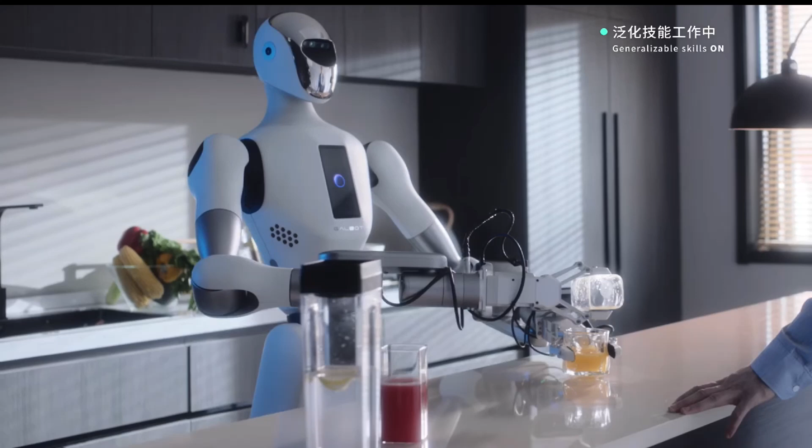In today's video, we'll explore the groundbreaking technologies coming out of China, meet some of the most advanced robots in the world, and discuss how these innovations are set to change our future. Get ready to be amazed and maybe even a little bit shocked. So buckle up and join us as we uncover how robots from China are not just participating in the global tech race, they're leading it.

Galbot is a humanoid robot developed by Beijing Galbot, a robotics company founded in the Chinese capital in May 2023. The robot can grab designated items from racks, fold clothes, and open drawers and closets. The company focuses on developing robots with embodied artificial intelligence for industrial production and daily use. While traditional AI operates solely in the digital realm, EAI integrates digital AI with real-world applications, enabling robots to move, see, and interact with humans.

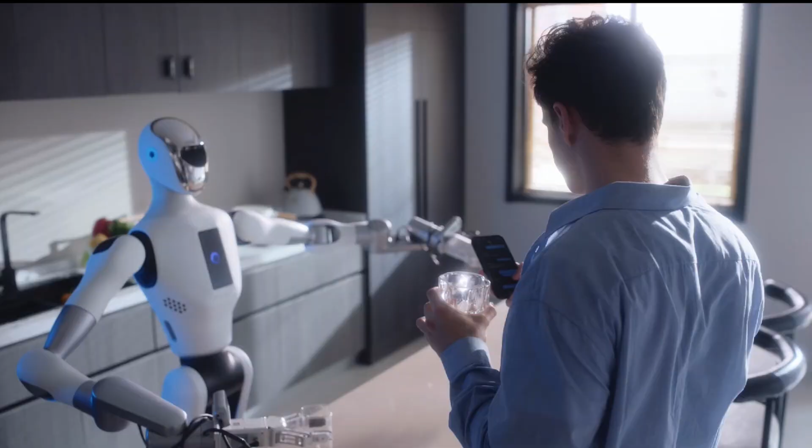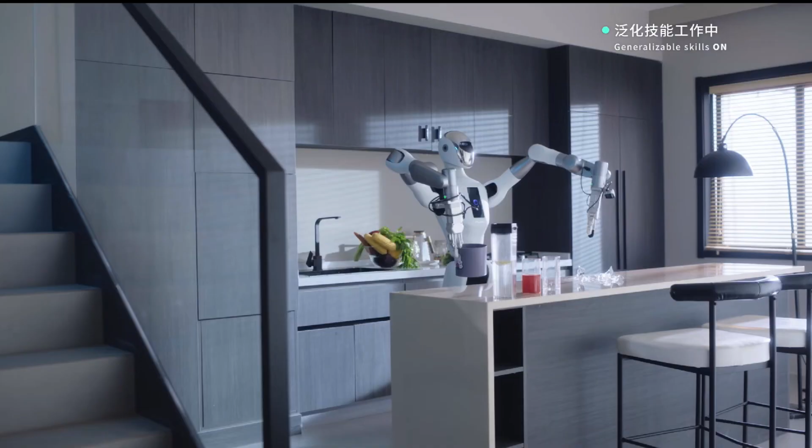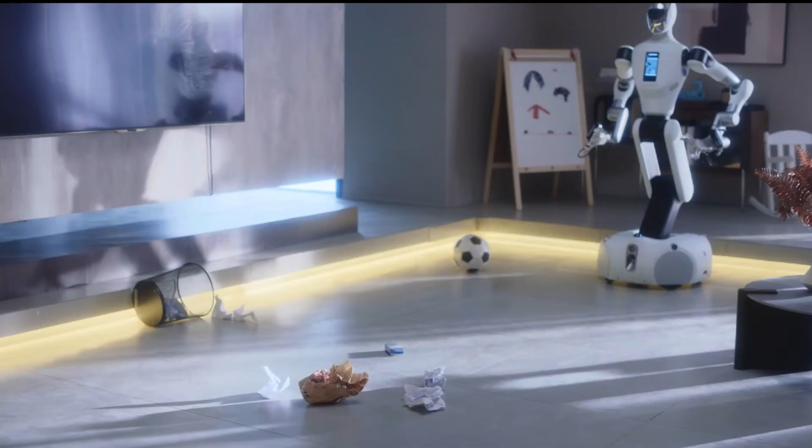Galbot, standing 173 centimeters tall, has a chassis that rotates 360 degrees. It can extend to reach a height of 2.4 meters and squat to perform tasks on the ground. Equipped with a system for sensing its environment and carrying out human commands, Galbot can identify specific items of different shapes or materials, autonomously navigate to them, and grasp them. According to Zhu, product director at Galbot, the robot is poised to be used in fields including automobile manufacturing and retail applications, like contactless supermarkets. The company is also exploring applications in logistics and agriculture.

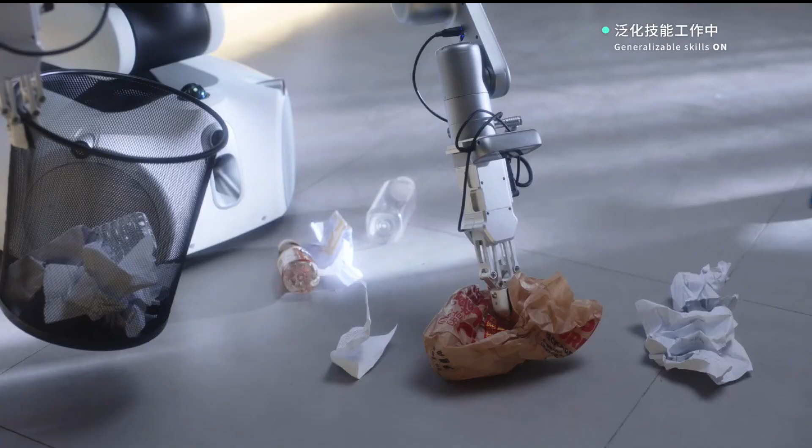The development of China's robotics industry can be attributed to the Chinese government's policy support and progress in independent research and development. The boom of AI and machine learning brings infinite possibilities to the robotics industry, Zhu said.

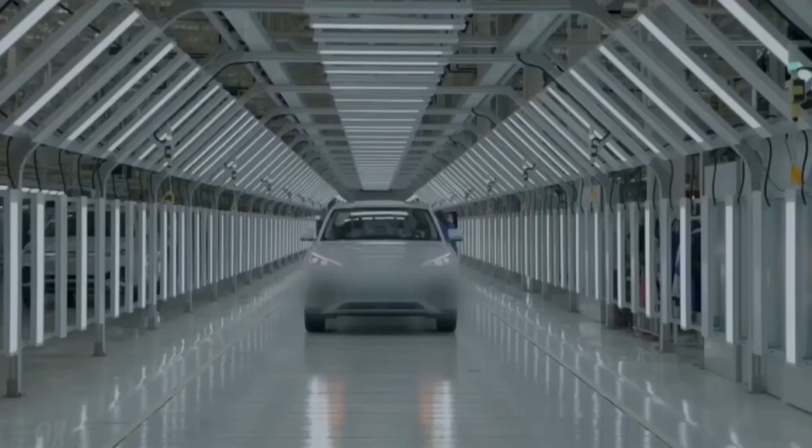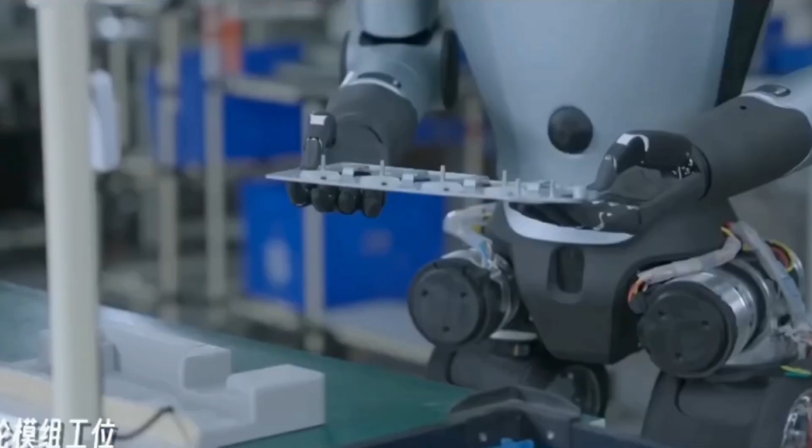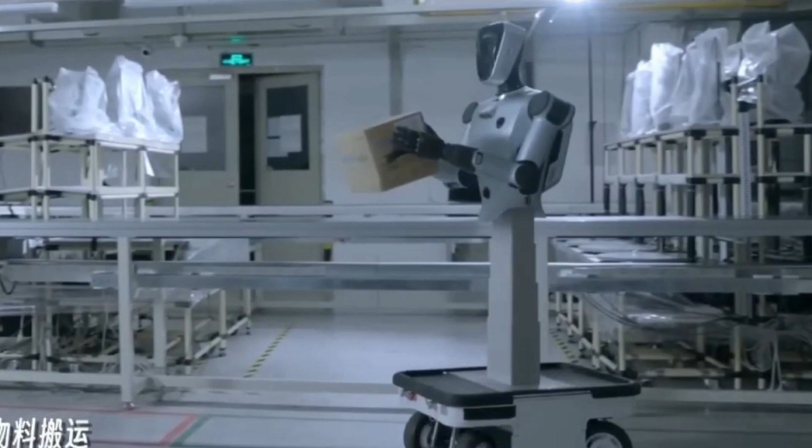Expedition A1 by AgiBot is a humanoid robot that stands 1.75 meters tall and weighs 53 kilograms. Initially designed for factory settings, this impressive robot also aims to find a place in household kitchens, making daily life easier for everyone. Expedition A1 can walk stably at speeds up to 7 kilometers per hour, demonstrating remarkable balance and agility. It's incredibly versatile, capable of performing a wide range of tasks, such as tightening bolts on assembly lines, using inspection tools with precision, conducting thorough vehicle exterior inspections, and even being utilized in complex laboratory experiments.

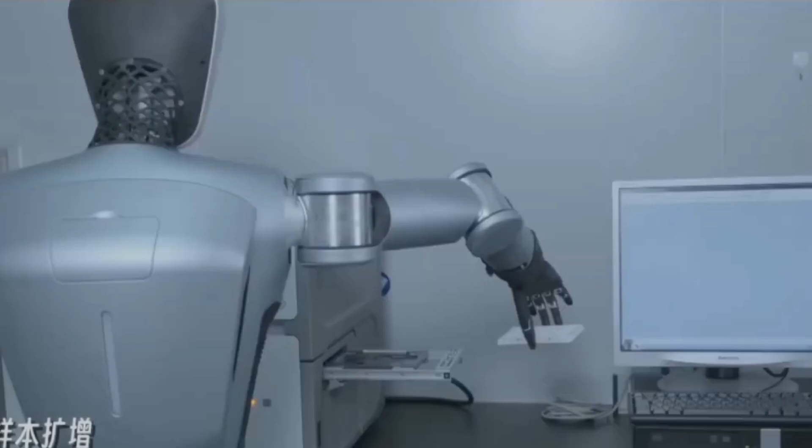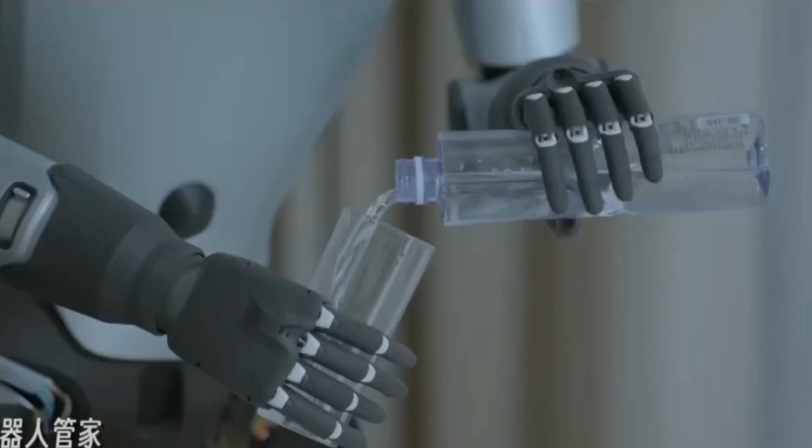Astribot's ambitious goal is to further develop Expedition A1 into a reliable household assistant. Imagine a future where the robot can fetch and pour water for you, deliver medications with care, and efficiently perform household chores like preparing ingredients, cooking meals, and even cleaning up afterward. The possibilities don't end there. In the future, Expedition A1 could be a valuable educational aid, helping children with their homework by providing explanations, guidance, and even giving a thumbs up for good work, fostering a positive learning environment.

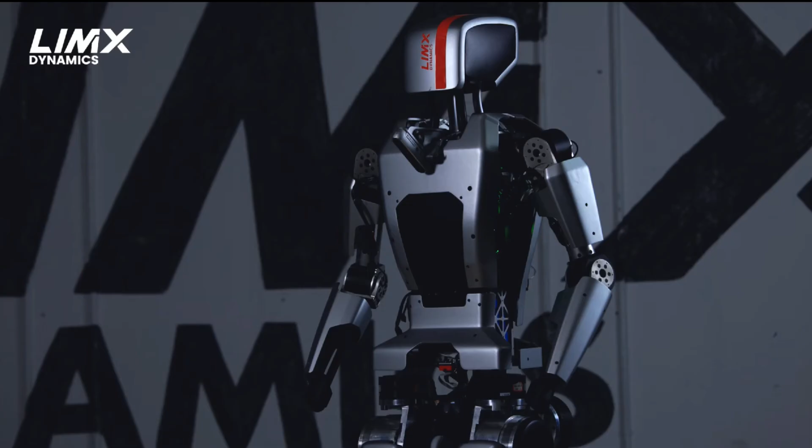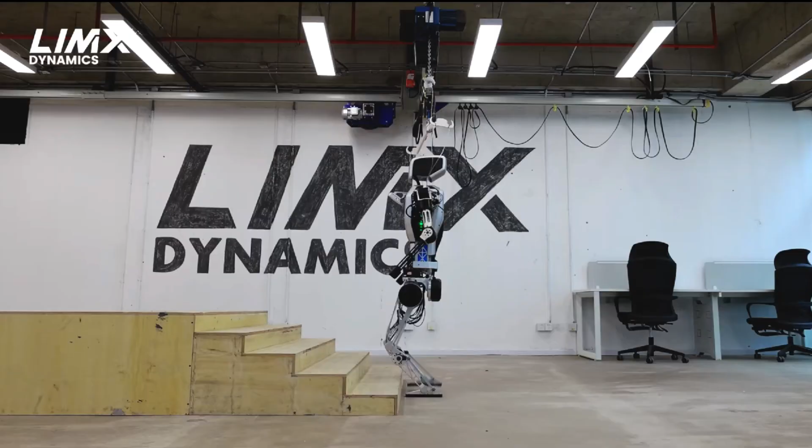LimX Dynamics introduced a new humanoid robot called CL1. The Shenzhen, China-based company claims that CL1 can perform various tasks by closing the loop between real-time perception, gait planning, locomotion control, and hardware and data streams. During testing, CL1 used perception control to adjust its motion proactively. This allowed the robot to take smooth steps onto a curb, ascend stairs dynamically and fluidly, and walk down a 15-degree slope. The company tested CL1 indoors and outdoors, from afternoon to dusk, to evaluate its performance in different environmental conditions.

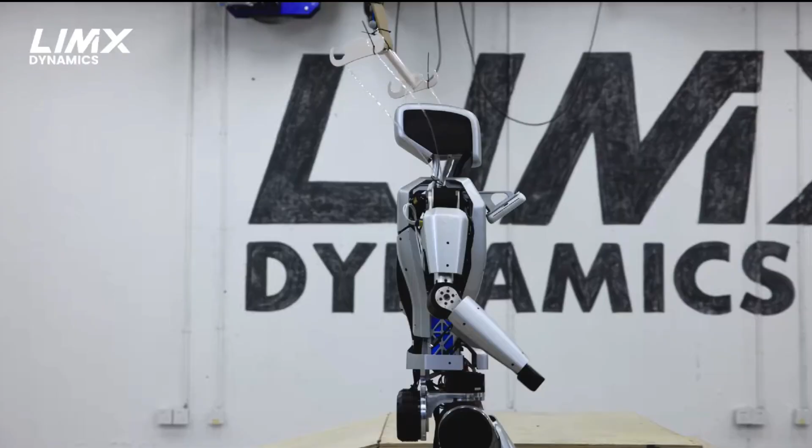LimX Dynamics expects its humanoid robots to be deployed in B2B and B2C applications. They plan to focus on hazardous scenarios, high-end customer service, automotive manufacturing, and in-home services. The company's environmental perception technology is a key part of the evolution of its humanoid robots. CL1 uses advanced algorithms to achieve full-loop integration of perception, controls, and hardware, according to LimX. This allows the robot to break free from the limitations of blind locomotion and achieve real-time interactive motion with its environment. The robot uses self-developed actuators, which the company claims provide exceptional impact resistance and precise, rapid torque control. All of its robots, from wheeled quadrupeds to humanoids, are based on a core set of algorithms.

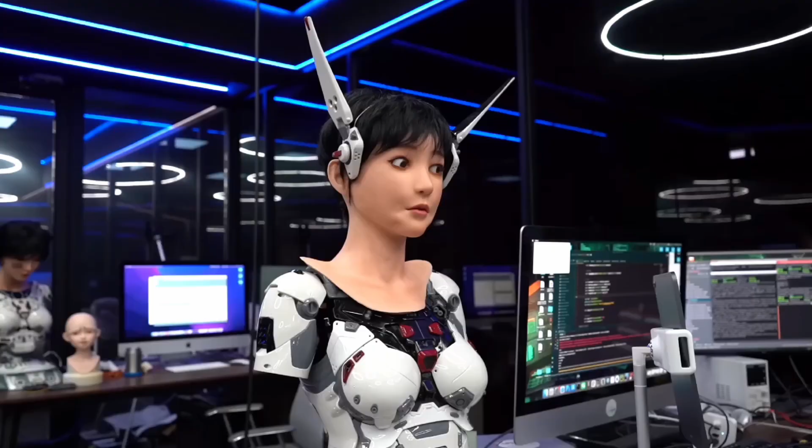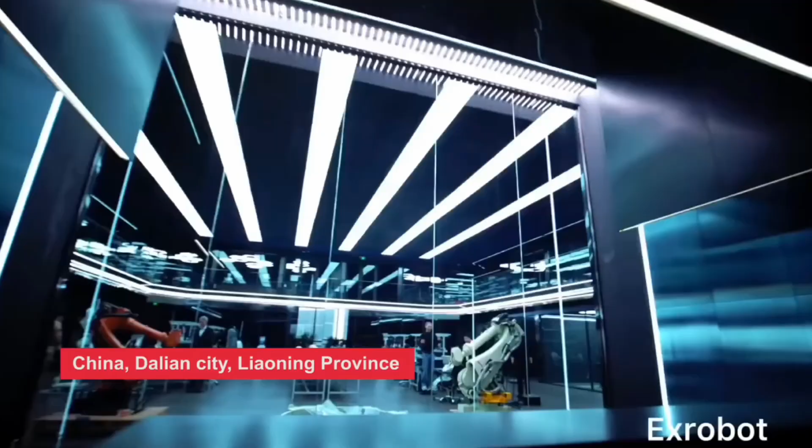One of the most striking examples of Chinese humanoid robots comes from Exrobot, a company known for its lifelike androids. A recent video from inside their factory has shocked the internet, showing partially skinned humanoids with human-like hair, skin, and movements. This level of realism has plunged viewers deep into the uncanny valley, where human-like robots elicit a sense of unease and discomfort. Exrobot's approach to humanoid design is not without controversy, as the company has embraced the lifelike appearance of their creations. The attention to detail in the female robots, complete with goosebumps on their silicone skin, suggests a deliberate attempt to captivate and intrigue the audience.

This strategy, while polarizing, has succeeded in drawing attention to the company's capabilities. While Exrobot humanoids may appear to be cutting-edge robotics, they are, in fact, highly advanced animatronics. The company's X Future Science and Technology Museum in Dalian showcases a range of lifelike characters, from Einstein to Edison, blurring the line between reality and fiction. Visitors can even control a humanoid head using motion capture, further immersing themselves in this uncanny world.

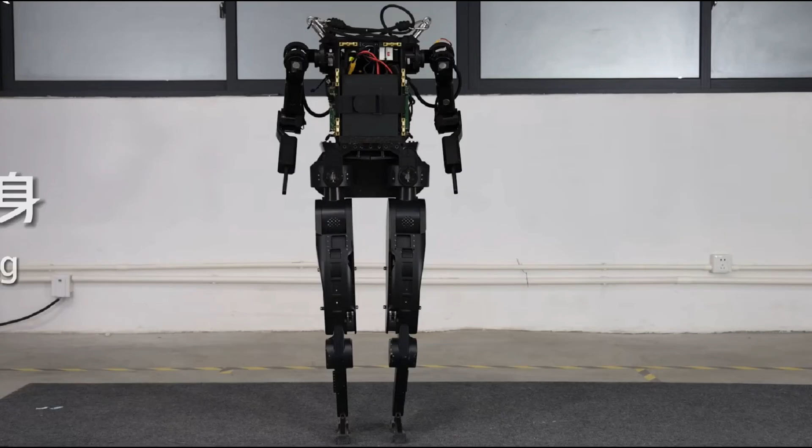While ExRobots may be grabbing headlines with their uncanny androids, the real story in Chinese humanoid robotics lies with companies focused on developing practical, general-purpose robots. In October 2023, XPeng, an automobile-focused company, introduced its self-developed humanoid bipedal robot, PX5. After 5 months of exploration, the robot has achieved stable walking capabilities and can navigate various obstacles, demonstrating stability across all terrains. Standing around 1.5 meters tall and sporting a silver-white color, PX5 resembles the Japanese anime character Astro Boy.

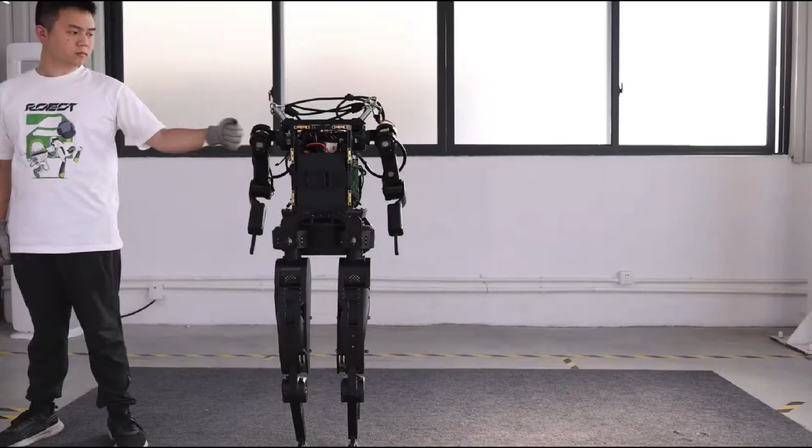Resistant to shock, the PX5 can withstand impacts and remain steady even when kicked. It can also maneuver on grass and rocky terrain, play football, ride Xiaomi's self-balancing scooter, and more.

Research at Xpeng is also underway to develop new components to improve the performance of its humanoid robots while reducing costs. For example, the company has developed high-performance joints to achieve stable walking abilities, enabling the PX5 to walk indoors and outdoors for over 2 hours and overcome obstacles.

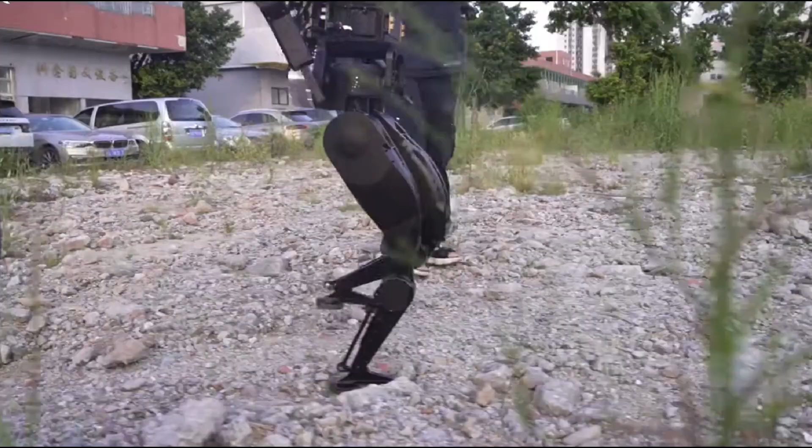Dexterity is another technical challenge that Xpeng is actively addressing. While other companies are cautious about developing robotic hands and prefer to wait for suitable suppliers, Xpeng has developed a series of robotic hands and mechanical arms.

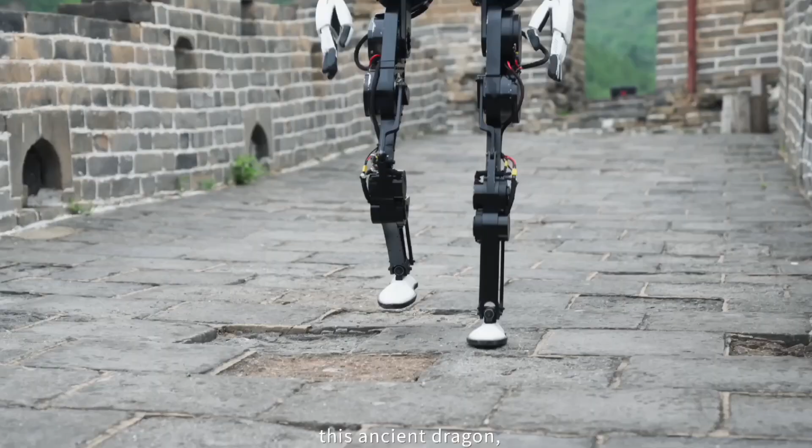Xbot-L, developed by the company Robot Era, claims it is the first humanoid robot to climb the Great Wall of China. This claim is likely accurate since most humanoid robots are still confined to laboratories or factory floors, not exploring iconic tourist sites. While the Xbot-L may not be as swift as other more developed humanoids, it demonstrated a remarkable ability to navigate the uneven and broken pavement of the Great Wall.

It also adeptly handled stairs and even performed Tai Chi moves upon reaching one of the wall's guard towers. Robot Era attributes these capabilities to its proprietary reinforcement learning technology, which allows the Xbot-L to manage unpredictable surfaces and explore dimly lit areas effectively.

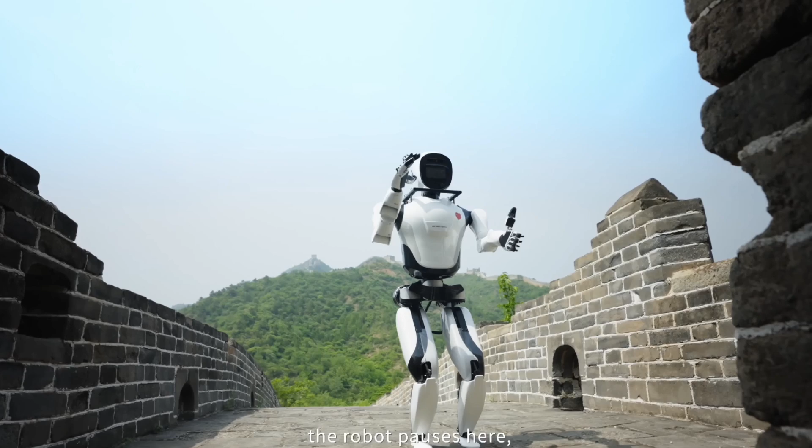Perceptive RL algorithms help to strengthen the robot's perceptive and decision-making capacity in the face of unfamiliar terrains. The robot thus can recognize complex road conditions and adjust its walking stance in a timely manner, said Yue Xi, co-founder of Robot Era, in a statement.

While the Xbot-L's climb may not significantly advance humanoid robotics, it serves as an ingenious promotional stunt by Robot Era, a company incubated by the Institute of Cross-Disciplinary Information Sciences at Tsinghua University in Beijing. By showcasing a humanoid robot on one of the world's most iconic monuments, Robot Era normalizes the presence of these robots in everyday settings and sparks the public's imagination.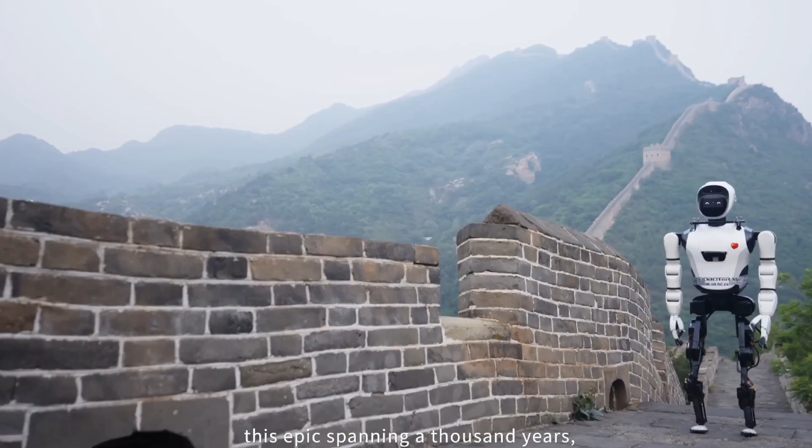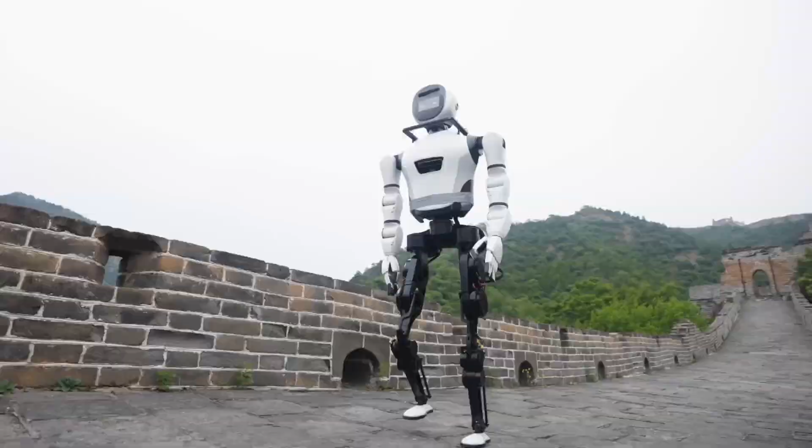As humanoid robots like the Xbot-L become more common, it's interesting to speculate about their future interactions in public spaces. In the future, we could potentially witness a new humanoid robot climbing the Eiffel Tower in Paris. As we move closer to a future where humanoid robots are a common sight, the Xbot-L's journey up the Great Wall stands as proof that these machines can do almost anything humans usually do.

Another Chinese firm making advanced strides in this realm is Astribot. This innovative company is a Shenzhen-based subsidiary of Stardust Intelligence and is a leading robotics firm focused on developing state-of-the-art AI robot assistants. Utilizing sophisticated imitation learning techniques, the S1 robot developed by Astribot can execute a myriad of intricate tasks that are highly beneficial to humans.

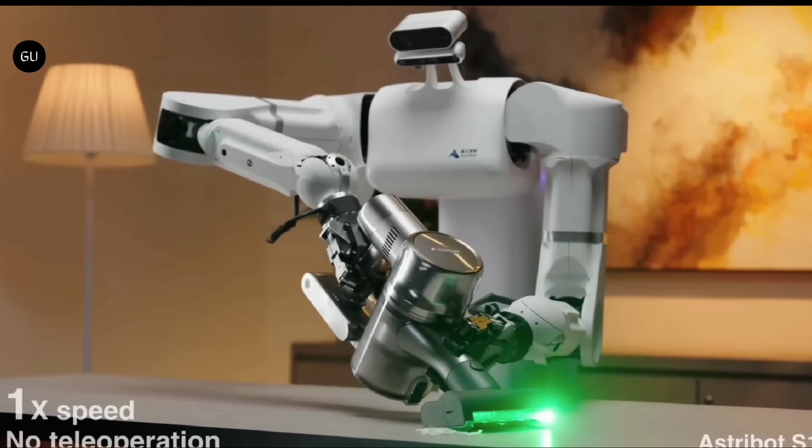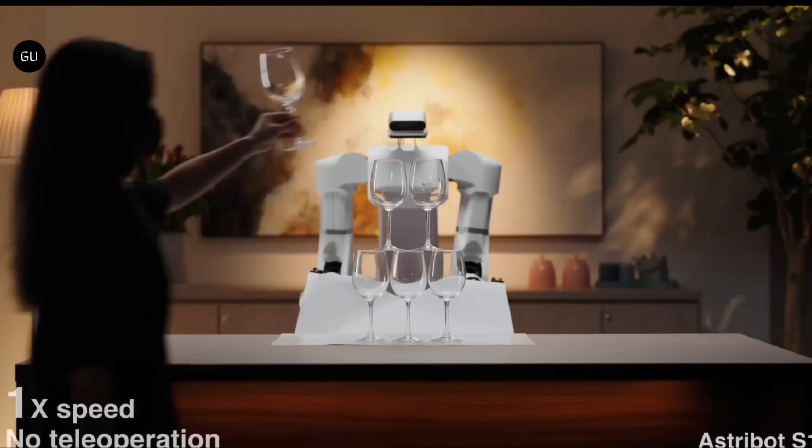It mirrors the operational speed and adaptability typically seen in adults, allowing it to perform complex actions with remarkable dexterity. For instance, the robot's pace is adept enough to smoothly pull a tablecloth from beneath a stack of wine glasses without causing them to topple.

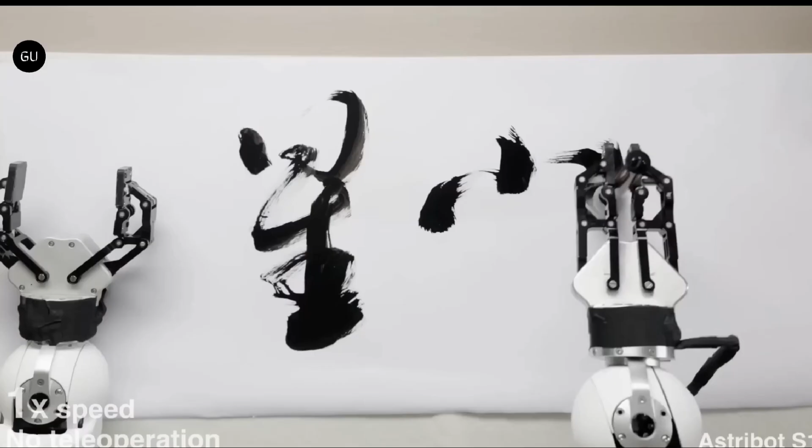Additionally, the S1 robot exhibits impressive speed and remarkable precision, seamlessly executing tasks such as opening and pouring wine, delicately shaving a cucumber with expert finesse, flipping a sandwich in a frying pan with perfect timing, and even executing intricate calligraphy with artistic flair. SUPCON Technology announced its first self-developed humanoid, Navigator Alpha, this year.

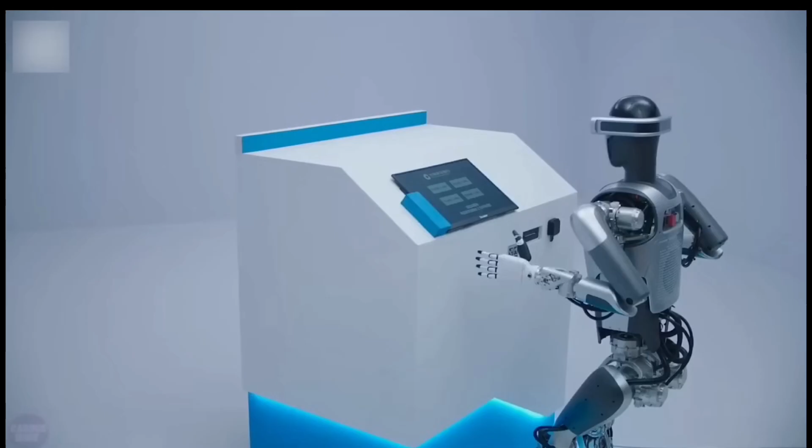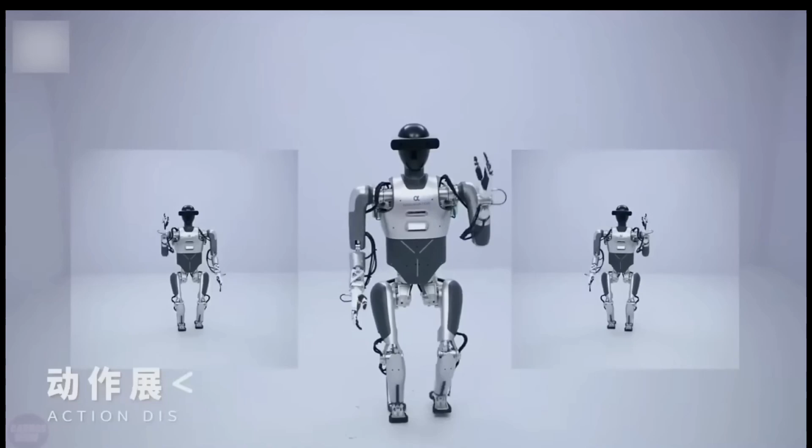The Navigator Alpha is 1.5 meters tall and weighs 50 kilograms. It has lightweight mechanical arms with dexterous hands and multiple degrees of freedom. These hands feature 15 finger joints, 6 active degrees of freedom, a fingertip force of 10 N, a lightweight design of 600 grams, and a joint speed of 150 degrees per second.

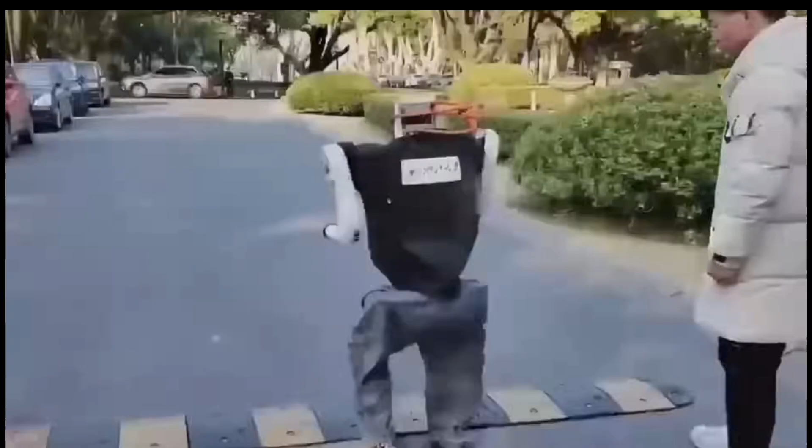Moreover, Navigator Alpha revolutionizes the integration of mechanism control, imitation learning, and reinforcement learning, leveraging innovative technologies like large-scale AI models to achieve groundbreaking advancements in both hardware and algorithms. It has already been deployed and highly recognized in several field-proven projects.

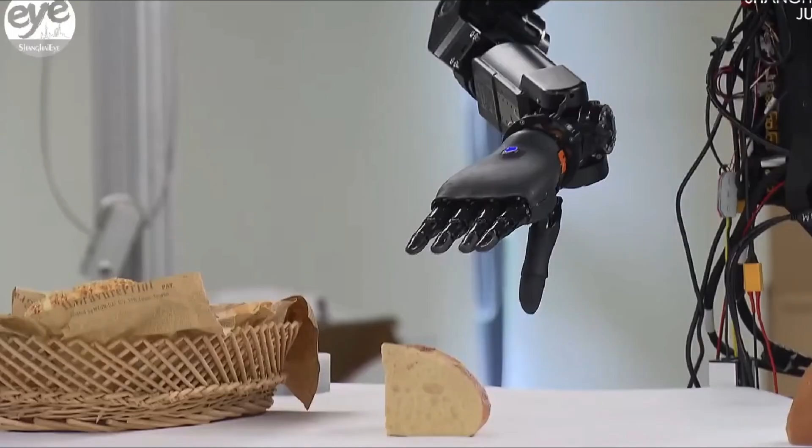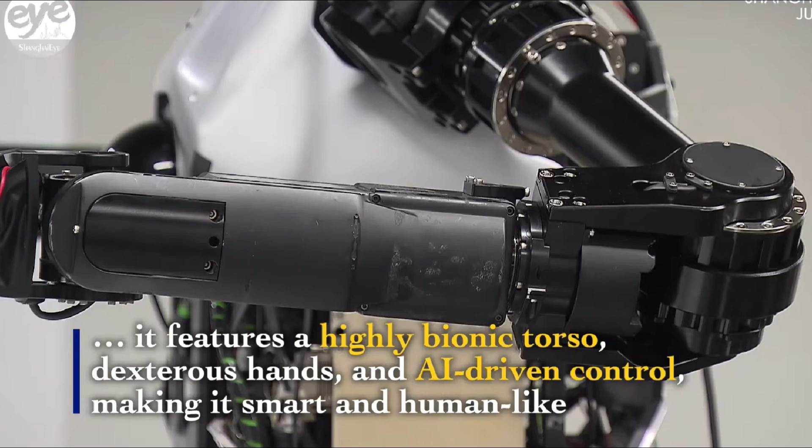China-based Humanoid Robots has unveiled Qinglong, a life-size general-purpose humanoid robot at the World Artificial Intelligence Conference 2024 in Shanghai. Standing at 5 feet 9 inches tall, Qinglong has dexterous human-like hands, allowing it to perform precise tasks such as manipulating objects. On display at WAIC, Qinglong picked up soft objects such as bread without damaging them.

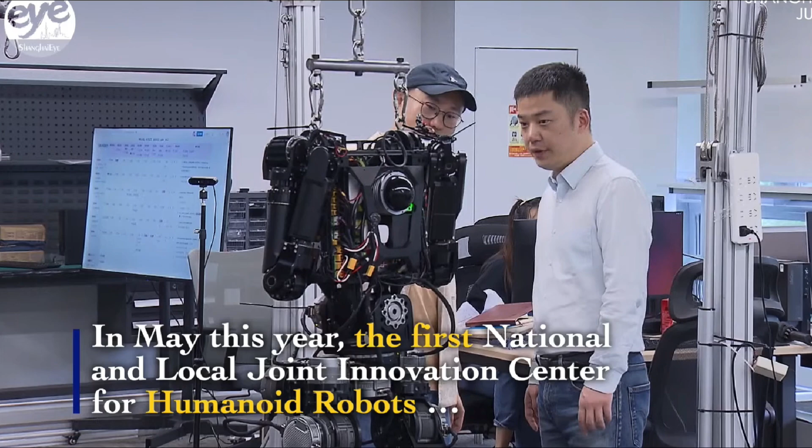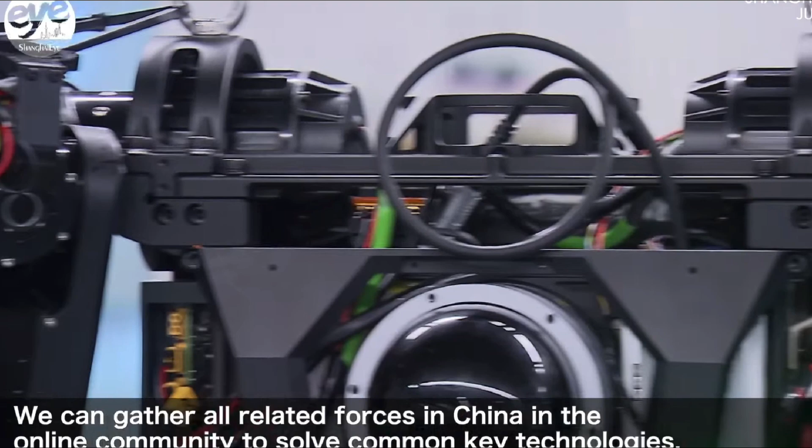The humanoid robot also picked up and put down several objects, including cups, with ease. Qinglong's built-in AI software can determine the level of strength needed to pick up a specific object. Qinglong weighs 176 pounds and has a bionic torso that offers the robot agile movement and anthropomorphic motion control. It has up to 43 active degrees of freedom, allowing for a wide range of motion. The robot is capable of athletic and off-road capabilities, according to the team.

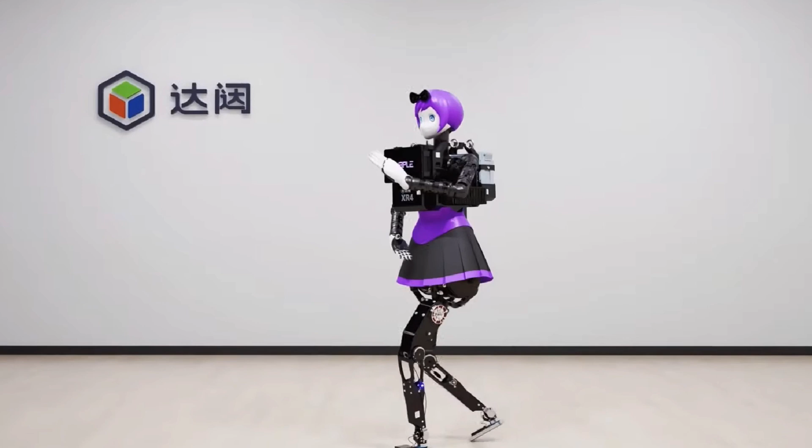Introducing the XR4, also known as the Seven Fairies, the latest humanoid robot developed by Data Robotics. Made from lightweight, high-strength carbon fiber composite material, the XR4 stands at 168 centimeters tall and weighs 65 kilograms. This innovative robot is equipped with over 60 intelligent flexible joints, allowing it to perform a wide range of movements with remarkable precision and fluidity.

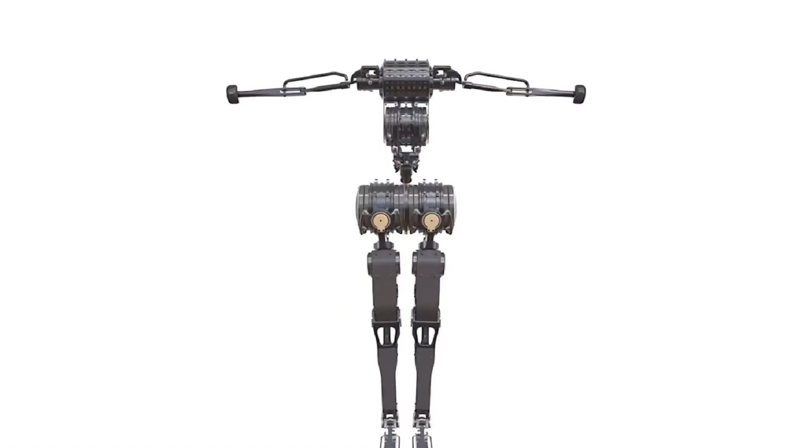The XR4 seamlessly integrates with the Data Cloud Brain in real time, which enables it to process and respond to complex commands almost instantaneously. This integration is powered by the Multimodal Large Model Robot GPT, which supports multimodal fusion, allowing the XR4 to combine visual, auditory, and tactile inputs for more sophisticated interactions.

One of the standout features of the XR4 is its ability to undergo intelligent training. This training allows the robot to achieve a stable standing posture, perform nimble dual-arm and hand manipulations, and even learn intricate dance routines. Imagine a future where the XR4 assists with household chores, cares for children, and provides companionship to the elderly.

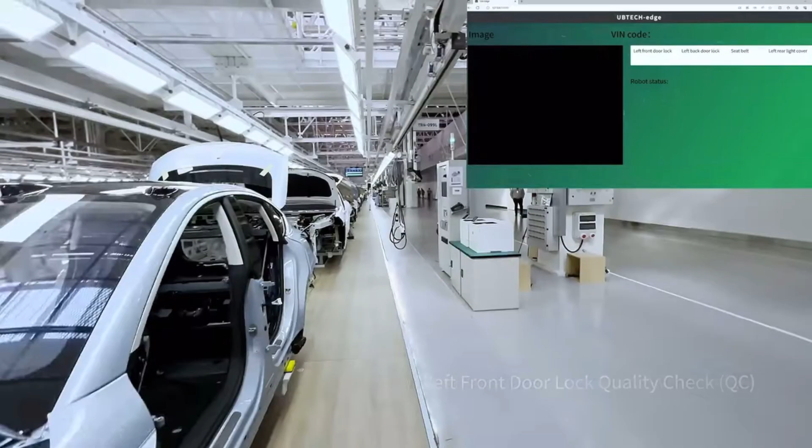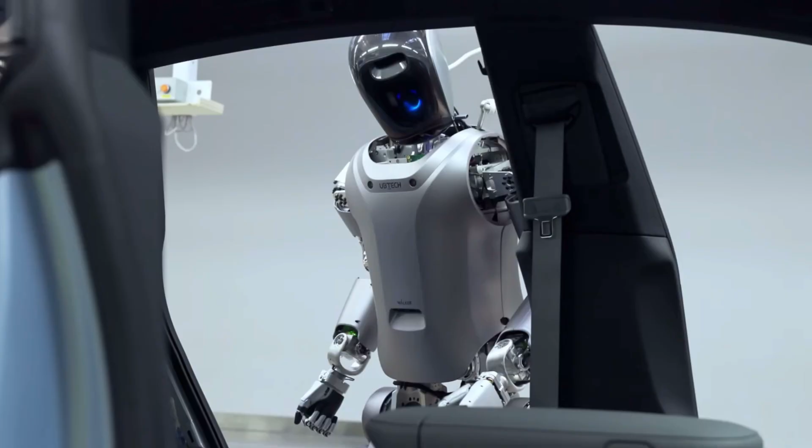Walker S by UBTECH Robotics is a practical and smart humanoid robot meticulously designed for versatility in various tasks and environments. Its core function is to become an indispensable part of daily human life, seamlessly integrating into routines and activities.

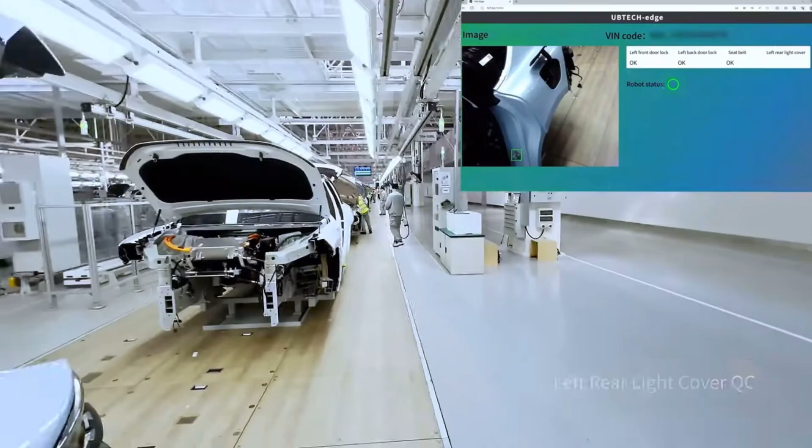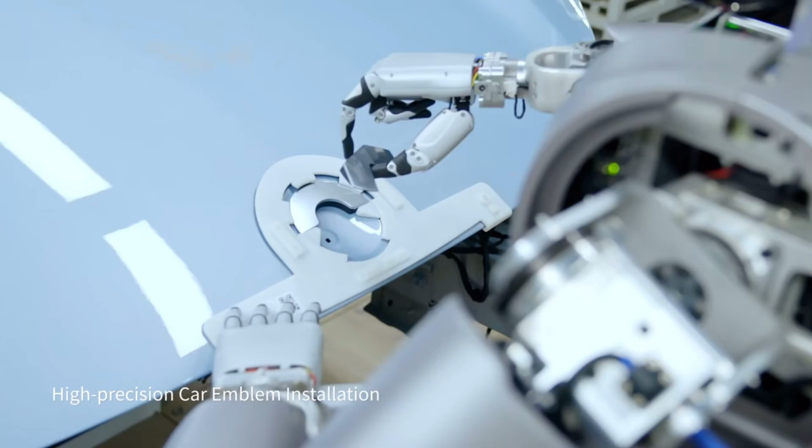Walker's advanced and flexible full-body control system ensures the utmost safety during interactions with humans, protecting users from potential accidents. Its arms are engineered to mimic human movements with high precision, greatly expanding its functionality and interaction possibilities, making it capable of performing a wide range of tasks.

Walker is equipped with the ability to navigate various terrains, which makes it highly adaptable to different settings, whether indoors or outdoors. It communicates effectively with humans through a sophisticated high-tech speech recognition system, allowing it to understand and respond to verbal commands accurately. Furthermore, Walker can imitate 28 different facial expressions.

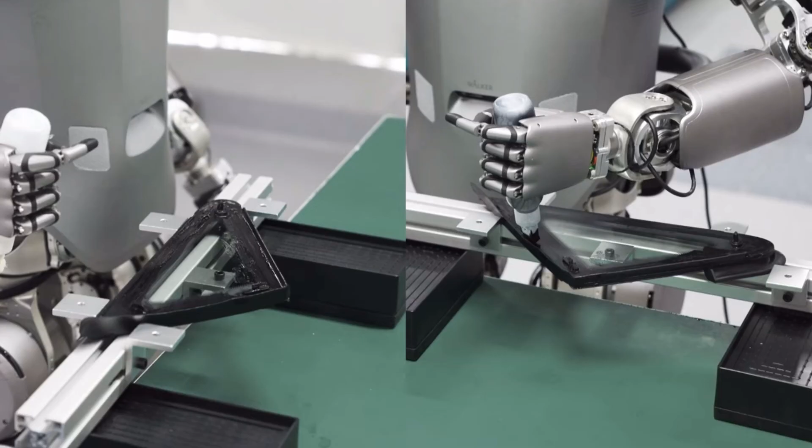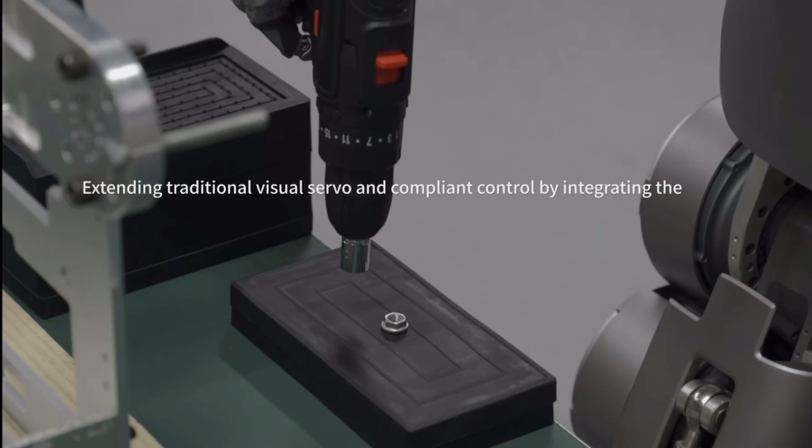This significantly enhances its ability to interact meaningfully and empathetically with humans. This feature allows it to not only perform tasks, but also to connect on an emotional level. It is not just a robotic assistant, but a genuine companion that can understand and respond to emotional cues.

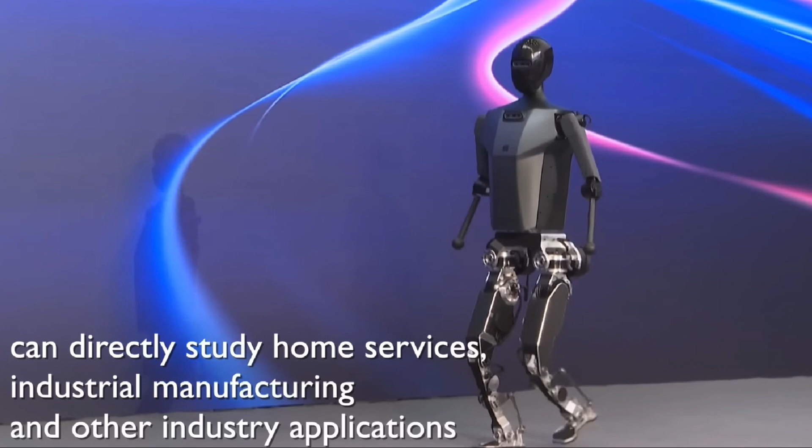Tiangong is described as the world's first full-sized humanoid robot, capable of running solely on electric drive. Tiangong can maintain a steady speed of 6 kilometers per hour. Developed by the Beijing Humanoid Robot Innovation Center Company, the robot is an independently developed humanoid robot platform ready for broader industry adoption.

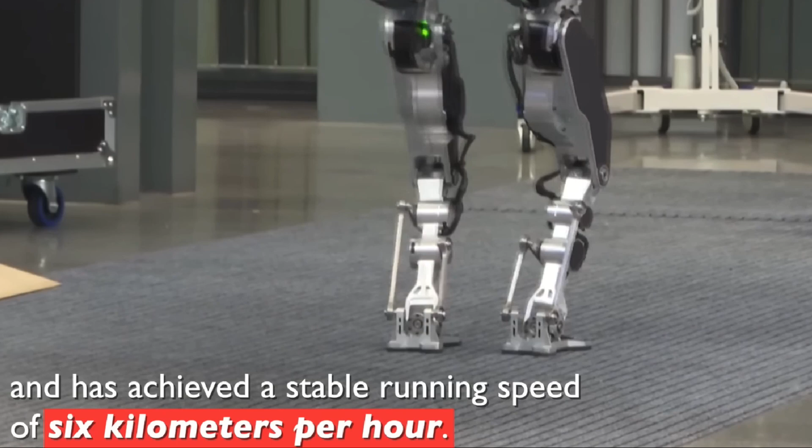Standing at 163 centimeters tall and weighing 43 kilograms, Tiangong is equipped with multiple visual perception sensors and boasts a computing power of 550 trillion operations per second.

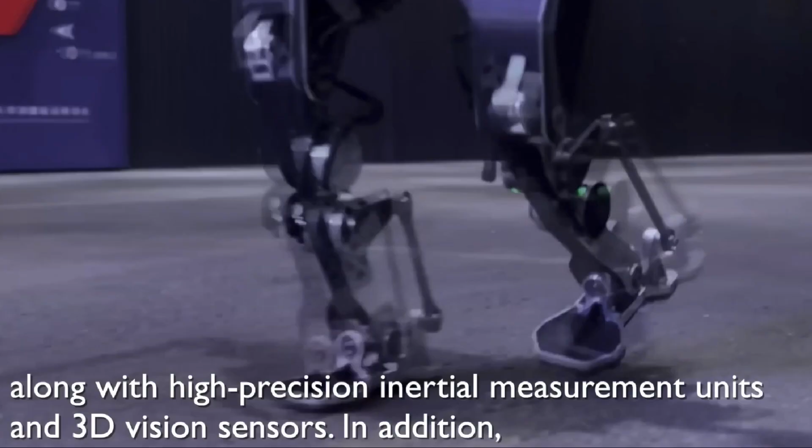Tiangong has demonstrated human-like running capabilities and offers open-source compatibility for further expansion, facilitating broader commercial applications, according to a developer briefing. The company, officially registered in the Beijing Economic Technological Development Area, was jointly established by enterprises that make complete robots, core components, and large models of robots, according to Xinhua News Agency.

Kuavo, by Leju Robotics, is the first domestic open-source humanoid robot capable of jumping and walking on various terrains. It is currently being introduced into households to perform tasks such as laundry, watering plants, flower arranging, and hanging clothes.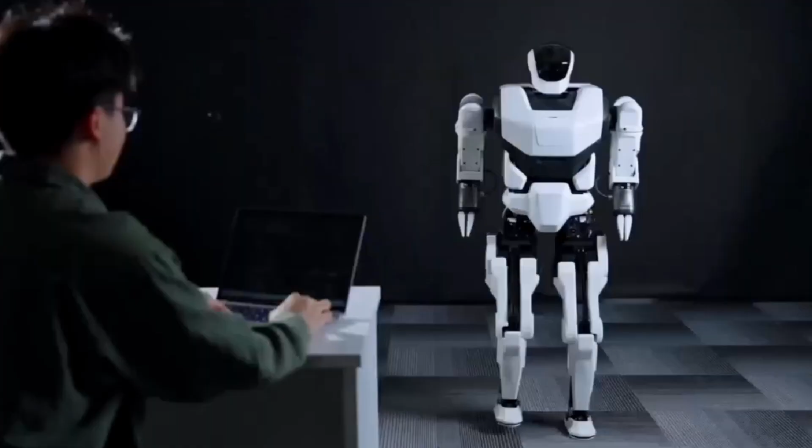Kuavo weighs about 45 kilograms and can walk in all directions with a maximum speed of 4.6 kilometers an hour. It can also jump to a height of 20 centimeters.

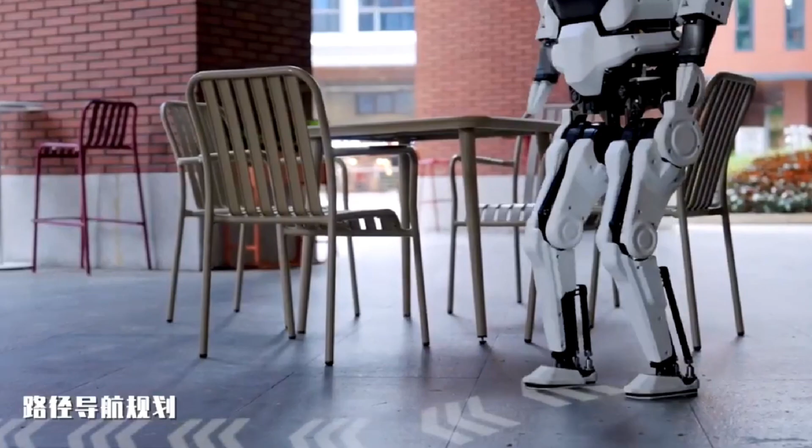According to the company, compared to its first version, which debuted in December 2023, Kuavo's upper limbs have significantly improved operational performance. It completes its tasks through object position recognition, terminal trajectory planning, and flexible object grasping.

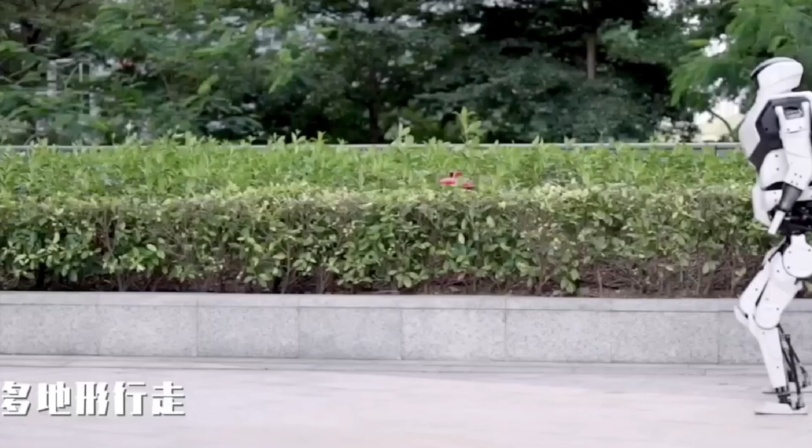In terms of technical improvements, Kuavo's arms have 28 plus degrees of freedom, and its ability to control whole body motion has been greatly enhanced. Kuavo runs on Kaihong OS, which is based on the Open Harmony system. It has an open-source motion controller that can be connected to various modules.

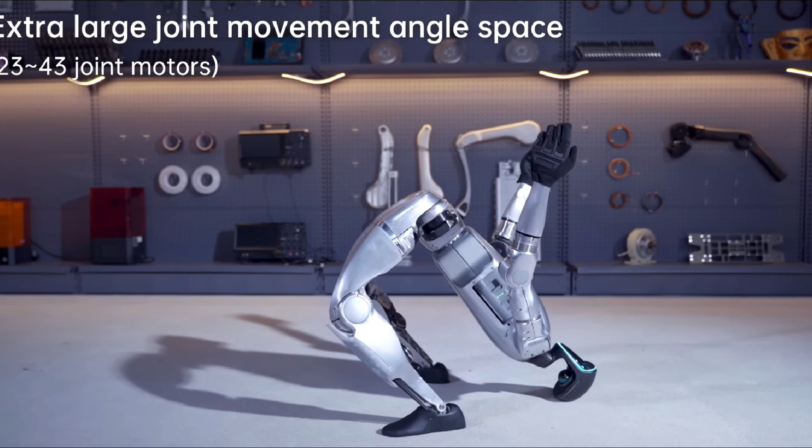The Unitree G1, which stands 1.27 meters tall, is shorter than its predecessor, the Unitree H1. However, its body flexibility has been significantly improved thanks to 43 motors that act as joints. This allows it to fold for easy transport, despite its 35 kilograms of weight.

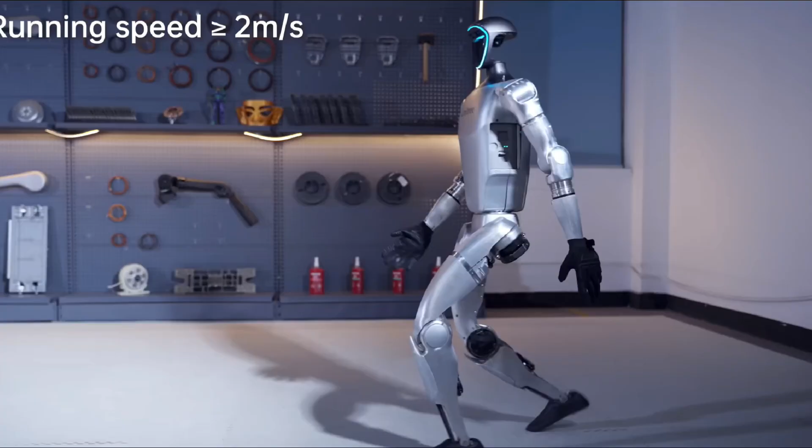Among its abilities, it can accurately manipulate a wide variety of objects, from cracking nuts to opening bottles, although not with the greatest delicacy. It also has contact sensors and can move at a speed of 2 meters per second.

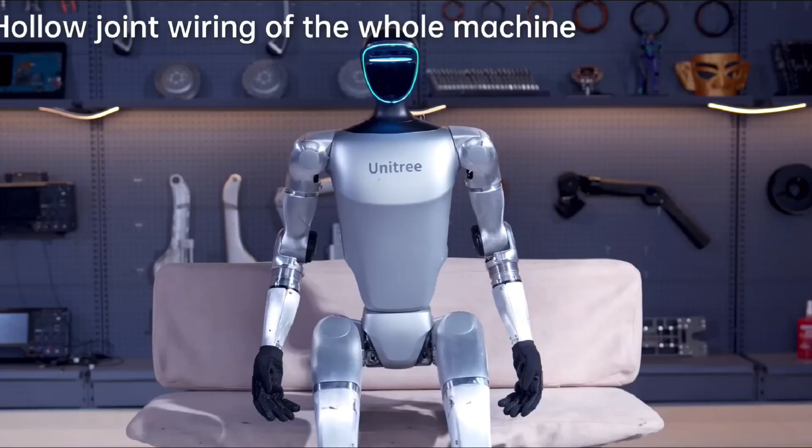The robot is equipped with cameras and a 3D LiDAR system in the head to detect objects around it, while its huge battery gives it a 2-hour autonomy. Unlike the new Atlas, the Unitree G1 is already available for sale for a price of $16,000.

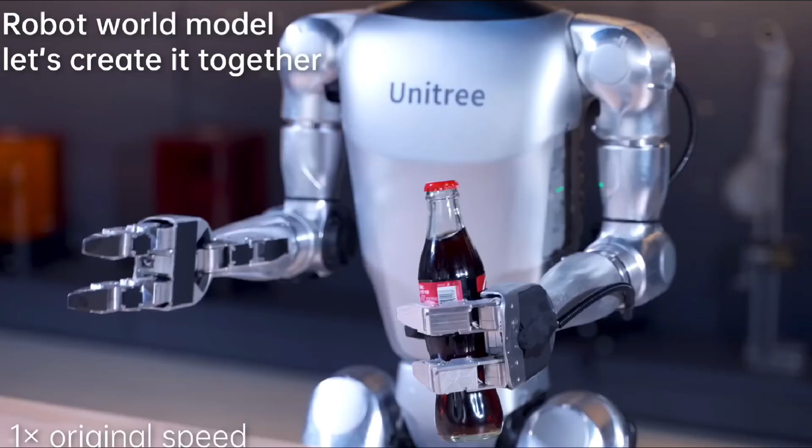The company has launched 2 versions of the robot, the standard G1 and the G1 EDU, the latter with greater endurance and strength in the limbs, as well as the ability to integrate an NVIDIA Jetson Orin chip, although its price has not yet been revealed.

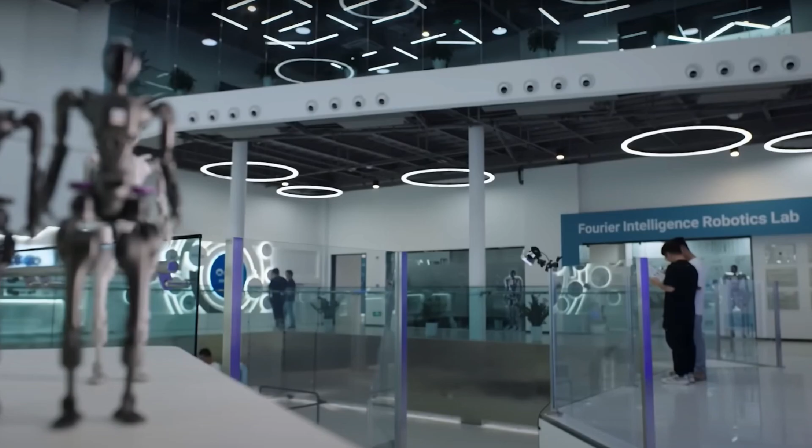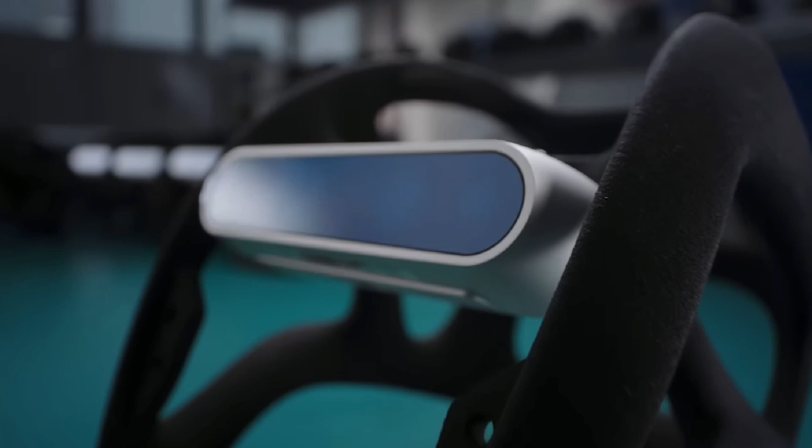Lastly, we would like to highlight GR1 by Fourier Intelligence. Fourier Intelligence has been manufacturing exoskeletons and rehabilitation devices since 2017. The Singapore-based company launched its first generation of humanoid robots this year, designated the GR1.

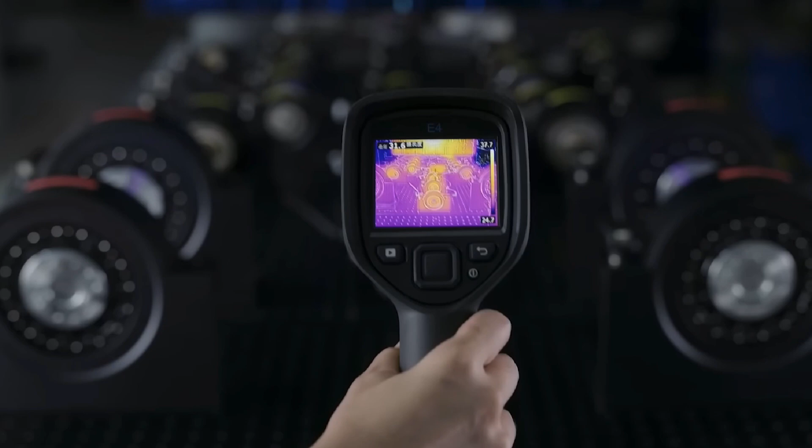The humanoid platform includes 40 degrees of freedom throughout its body. It measures 165 centimeters in height and weighs 55 kilograms. Fourier is exploring ways to deploy this device in disaster relief, senior care, and household service.

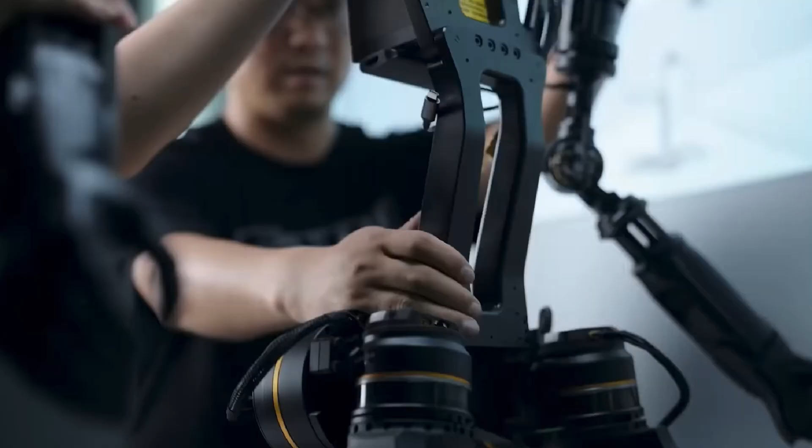It includes a large multimodal language model comparable to that which supports ChatGPT. This enables the robot to program itself to execute tasks, the company asserted. GR1 also features an integrated emotion AI module, a high-resolution oval display, and a circular microphone array for its voice recognition system. The GR1's robotic hands have 11 degrees of freedom, allowing it to securely grasp items, said Fourier.

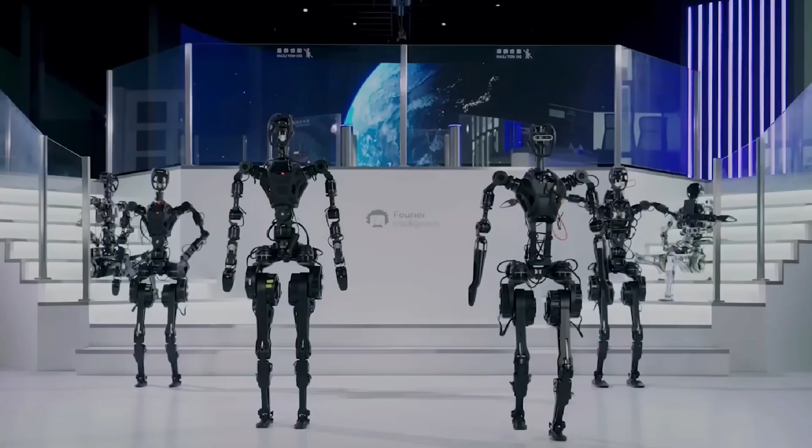The user can direct the robot to retrieve items. The hands imitate the range of motion in human fingers when grabbing cylindrical and round objects, such as bottled water and electric screwdrivers.